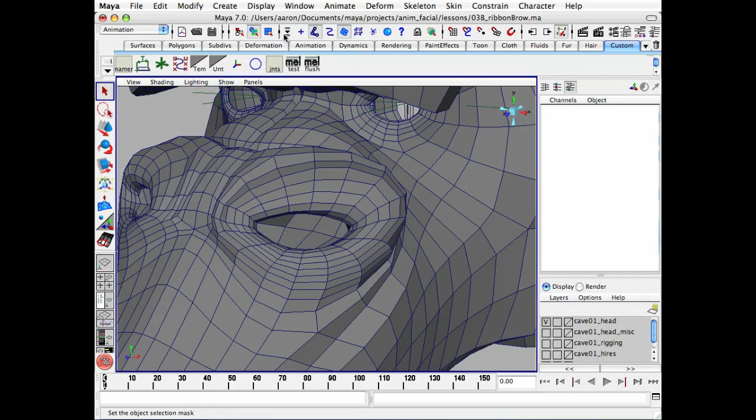We're going to start by building a visual guide, using a 1-degree spline going roughly from the inner corner to the outer corner of the nostril. I'll use point snap and select the create CV curve tool in the option box. Let me reset this, making sure the curve degree is set to linear. Close that, and once again with point snap on, I'm going to click.

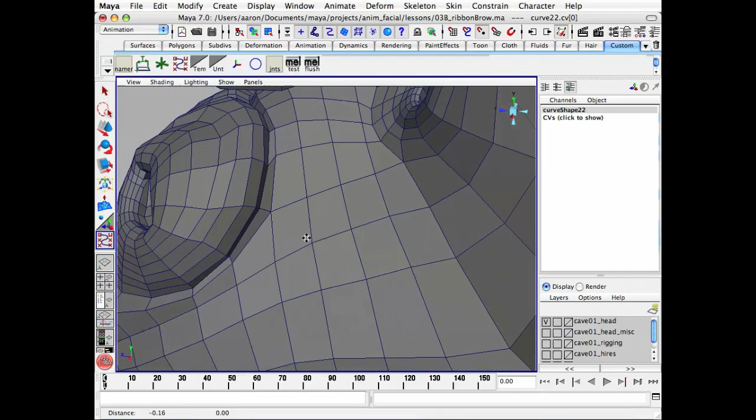Let's say right here on the inner nostril, and there for the outer.

Let me hide the polygons. Now I'm going to display the CVs on this curve: Display, NURBS component, CVs. You see we have one on each end. If I open the attribute editor, we can see that we have a 1-degree spline.

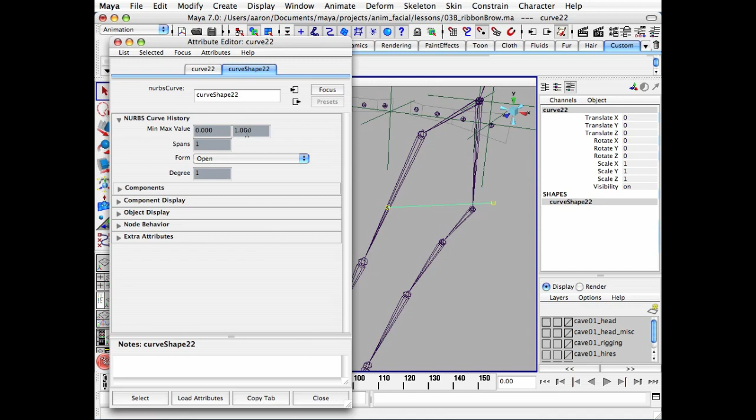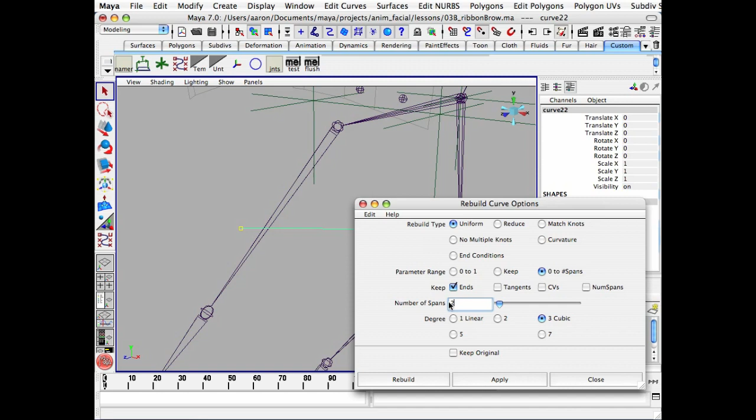With one span, I'm going to rebuild this so we have 2 spans, basically putting an extra CV in the center. With the spline still selected, switch to the modeling module and select Edit Curves, Rebuild Curve, option box. Let's reset this. I'll set the parameter range to 0 to number of spans, the number of spans to 2, and make sure the degree is linear.

If I hit rebuild, we can ignore the 2 CVs here. We're going to snap a joint on the first CV, the center, and the last.

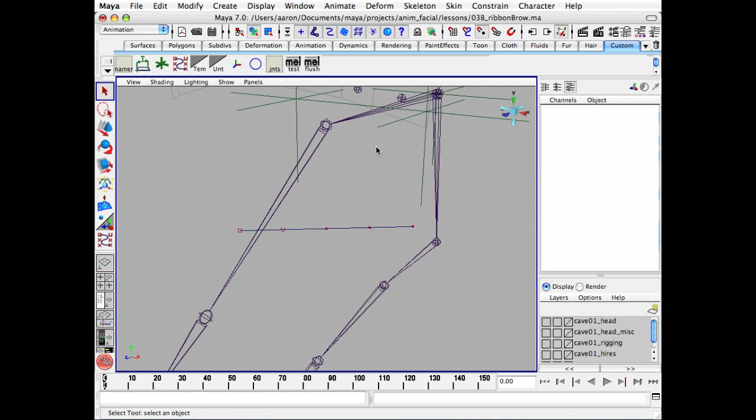I'm going to switch back to the animation module. We're ready to draw our first joint. Skeleton joint tool. Once again with point snap still selected, I'm going to click on the first, the center, and the last CVs.

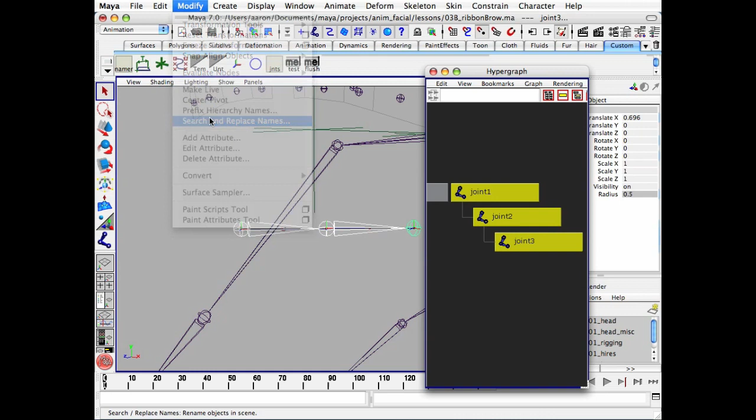I'm going to quickly rename these, because we're going to mirror them later on. I'll search for every instance of 'joint' and change it to cave01_l_nostril. I'm going to add an underscore JNT on the end here, since we're going to add these into the skin cluster.

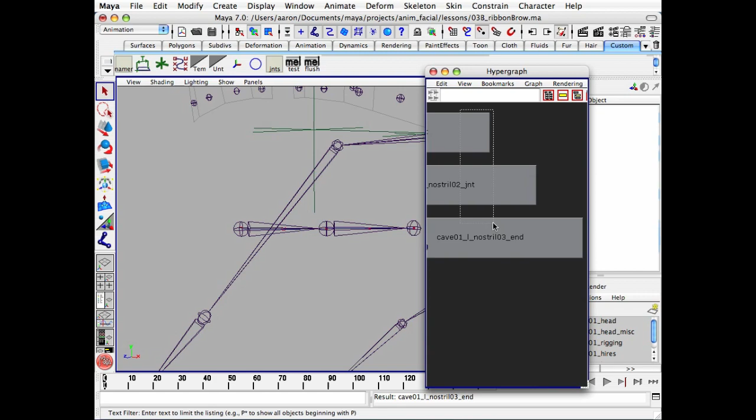This last one we're going to call 'end'. I'm going to display their local rotation axis: select all the joints and then select Display, Component Display, Local Rotation Axes.

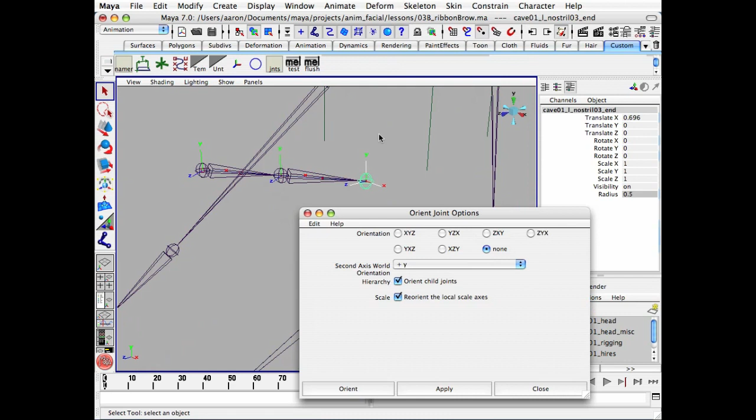First, let's orient the end joint. Skeleton, Orient Joint. Make sure our orientation is set to none, which means relative to its parent, there is no orientation change.

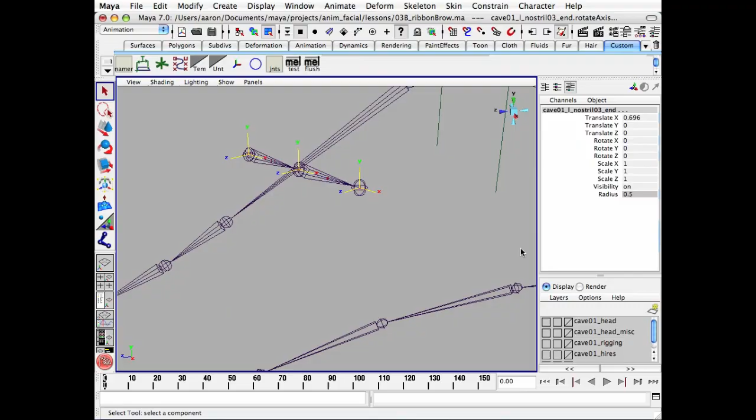I'm going to switch to component mode and toggle on the question mark icon, which selects the local rotation axis. I'll select all 3, display the geometry here, and just eyeball it. I'll rotate this so it's roughly matching the plane of the nostril. So here we can see the line is going through the plane of the nostril.

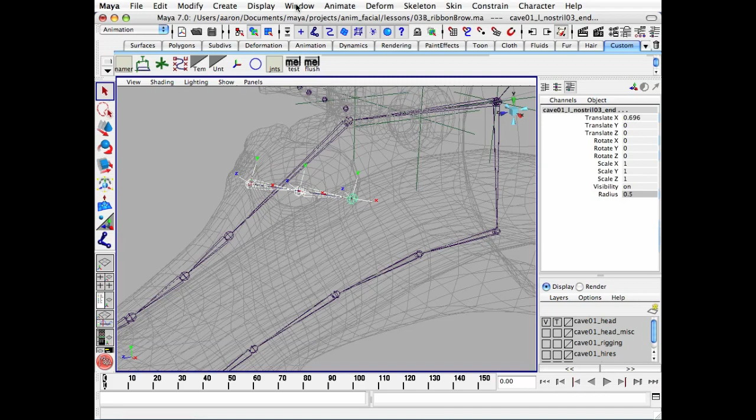Okay, switch back to object mode and hide these local rotation axes.

Now I'm going to create a 1-degree curve going from the center up to the outer edge and then from the center down.

Hide the joints for a moment. Reactivate our CV curve tool, once again with point snap selected. I'm going to click on the center CV here. Okay, so there's that. I'm going to show the CVs on that, and then create another curve going in the opposite direction.

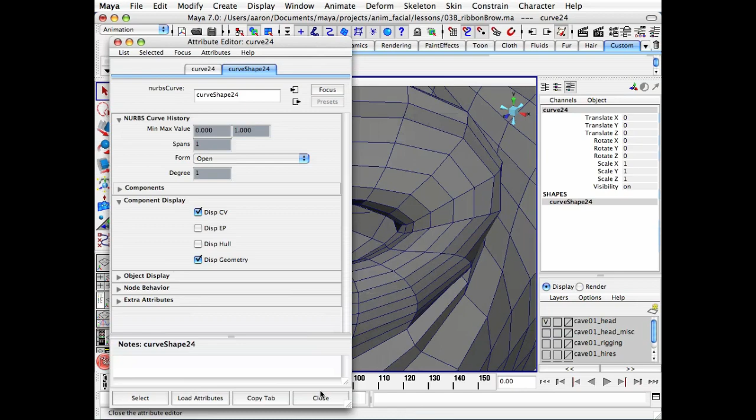Here I've activated curve snap, so I can snap to an edge, which Maya sees as a curve in this sense. Okay, so with that done.

Let's go in and create another series of joints. Let's show our joints once again, leaving our point snap turned on. Skeleton joint tool — create that joint, okay, and then create this. So we have one joint pointing up and the other pointing down on the nostril.

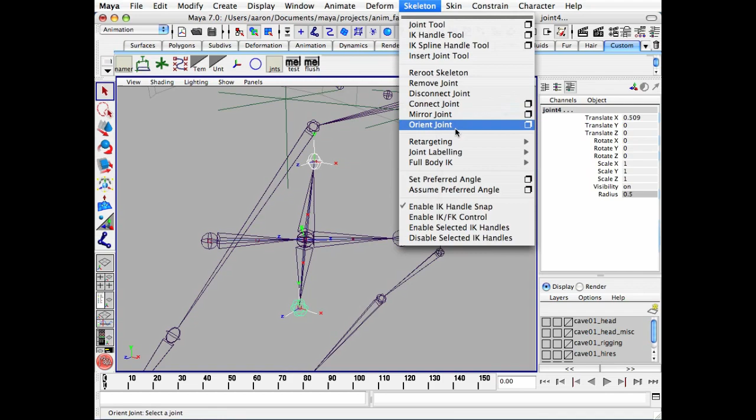I'm going to display their local rotation axes. I'm going to orient these end joints so that they match their parents: Skeleton, Orient Joint tool, and it's still set to none.

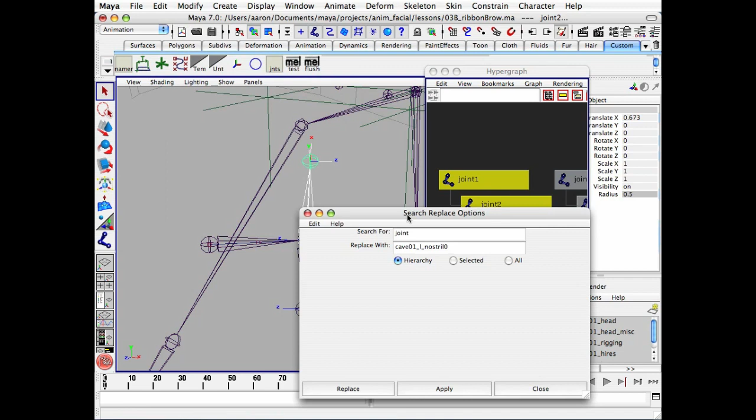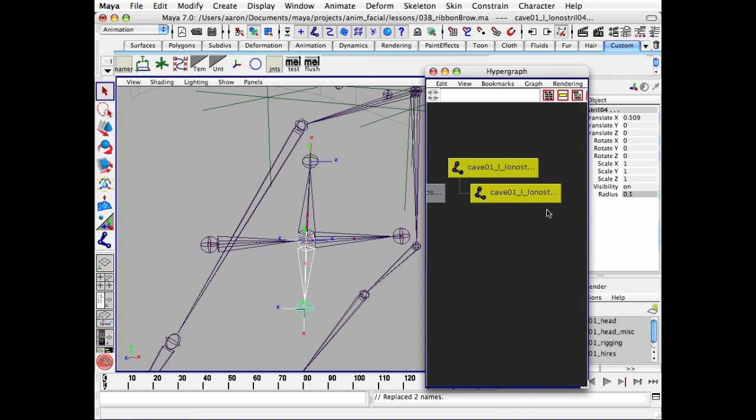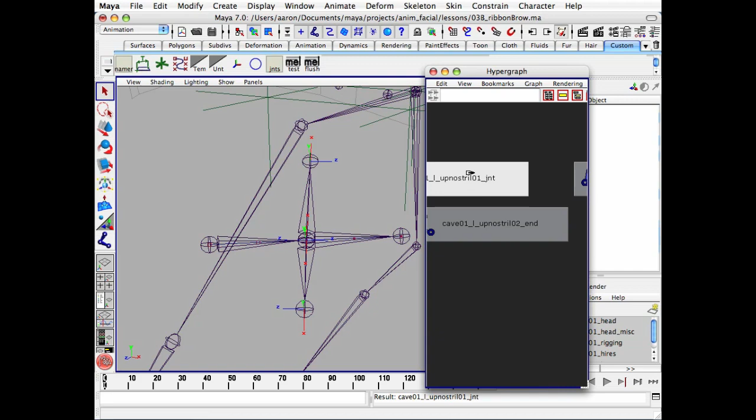Now let's name these. I'm naming these joints because we're going to need to mirror them later on. Once again, using the Modify, Search and Replace Names tool, I'm going to rename these to L up nostril. These will be low nostril. Change the numbering, change this to 01, JNT, and 02, end. And similarly rename this to end. And a JNT. So you can hide these local rotation axes.

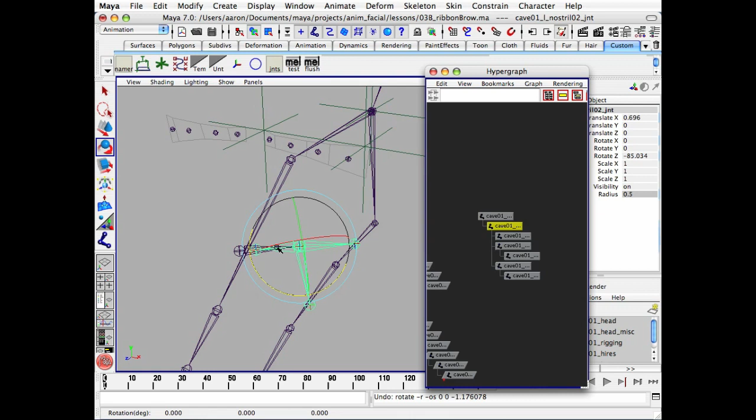So next what I'm going to do is, rather than simply parenting them, and I'll parent them to illustrate. If I were to parent them and then start rotating them, with approximately the 90-degree rotation, this lo nostril joint folds back on itself so that it points right back toward the first nostril joint. So rather than directly parenting them, we're going to create what I like to call an averaging joint.

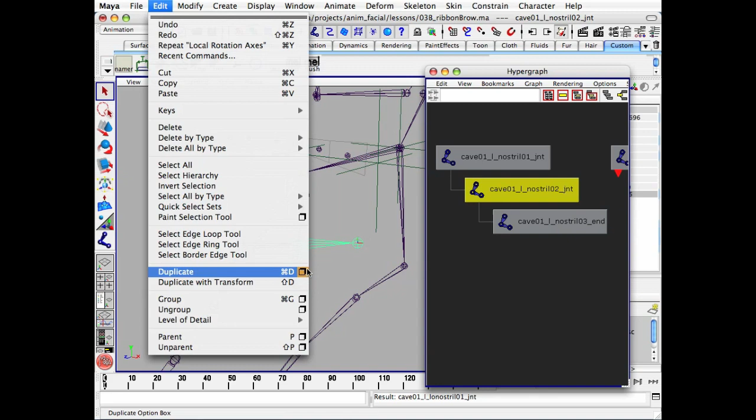What I'm going to do is I'm going to duplicate the second nostril joint. I can delete the duplicate end joint. I'm going to rename this from JNT to AVG. I'm going to parent this up and lo nostril joint to the new average joint.

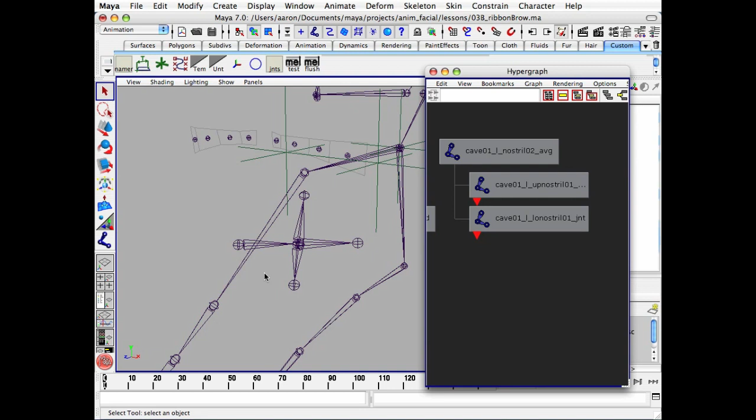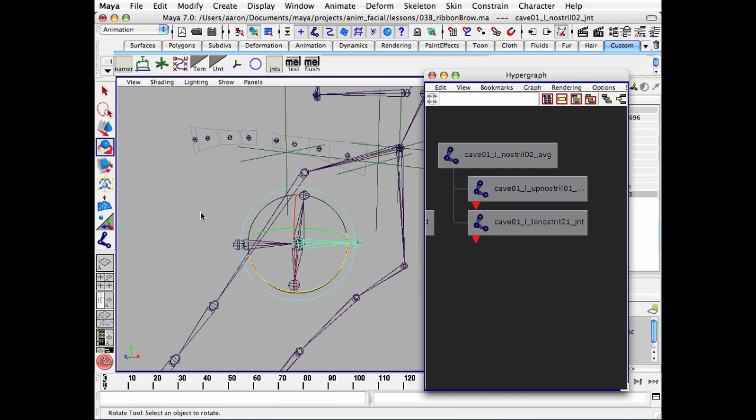So I'm going to use a multiply divide node so that this nostril average joint will average the rotations that it's getting from its parent, and it will do so by negating half the rotation. So for instance, if this were rotated 90 degrees in Z, let's say if it's negative 90, I'll multiply it by negative 0.5, negating 45 degrees of the rotation. Once we set up these node connections, it'll be fairly apparent what the end result is going to be.

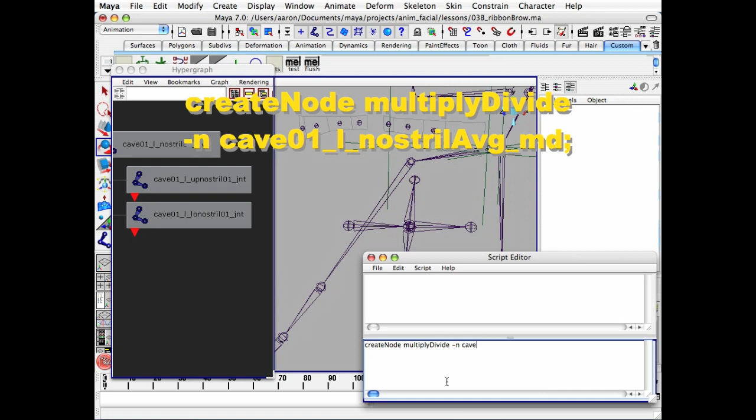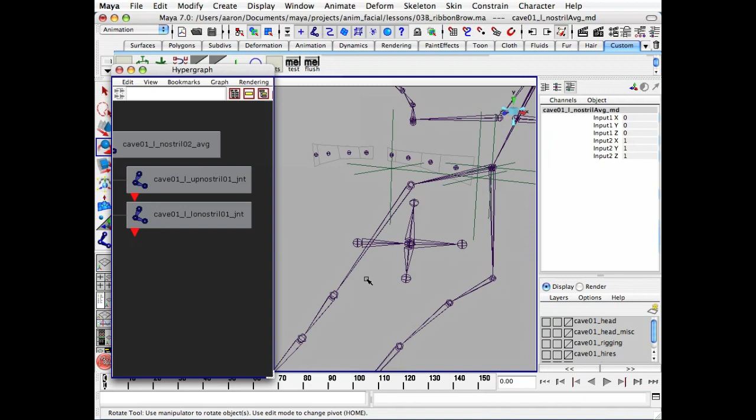Let's open up our script editor. Let's clear this out. I'm going to start by creating a multiply divide node. Create node, multiply divide. Let's give it a name. Okay. Now that this multiply divide node is created, I'm going to open the attribute editor and make sure it's set to multiply, which is the default. Then immediately open up the connection editor. Window, General Editors, Connection Editor.

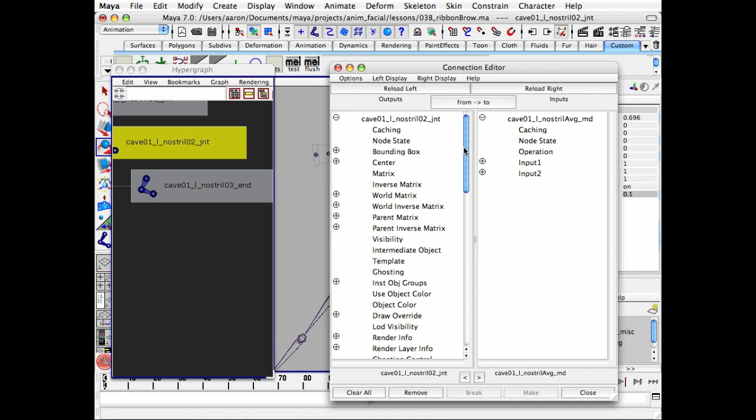So first I'm going to connect the rotation of the second nostril joint into the multiply divide node. So I'm going to load the multiply divide node into the inputs. Select the second nostril joint and load that into the outputs of the connection editor. Scroll down until I find rotate and connect that into input 1 of the multiply divide node.

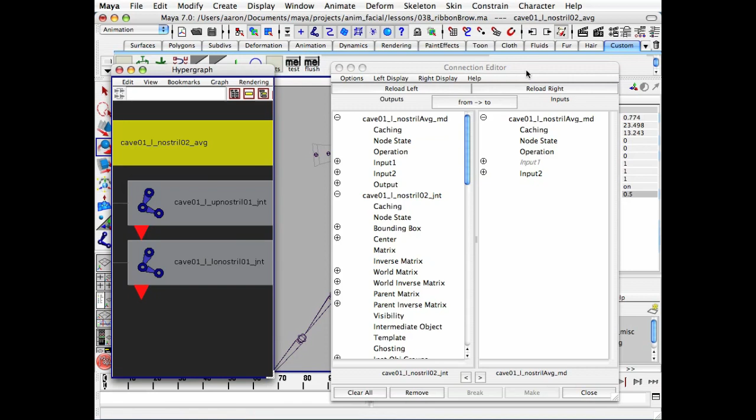Now in the channel box, I'm going to click on the multiply divide node so that that's selected. Load that into the outputs of the connection editor and scroll up until I find the outputs. Then select the nostril 02 average joint, load that into the inputs, and connect the output of the multiply divide node into the rotation of the average joint.

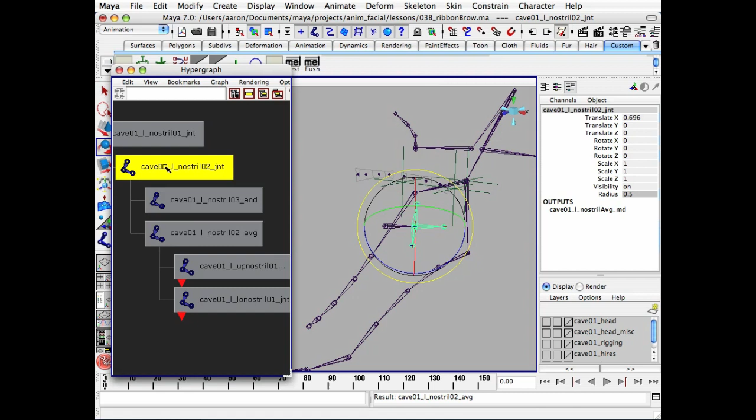So right now, even without parenting, it behaves as if it is parenting. So I have a negative 45-degree rotation on the second nostril joint. If we look at our average joint, we have a negative 45-degree rotation in Z as well. That's because there's a direct connection. What I'm going to do is I'm going to parent the nostril average joint to the nostril 2 joint. So now when we rotate this, we're going to get double the rotation because we'll get the rotations from the parent-child relationship as well as from the node connection. You see there we're getting double the rotations.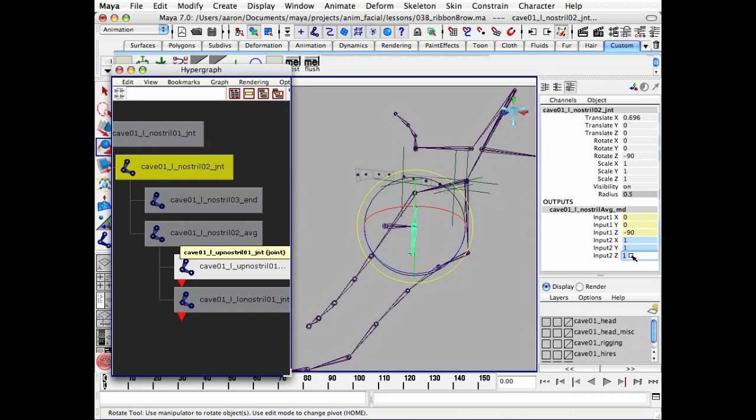Let's set this to minus 90. What we need to do is we need to set all of the input 2 channels of the multiply divide node to 0.5. What that effectively does is it negates the rotations by half, which in essence averages those rotations. If we rotate to a negative 90, rather than folding back on itself, it dampens or averages those rotations. So that way we'll be able to maintain a lot more volume in the nostrils here.

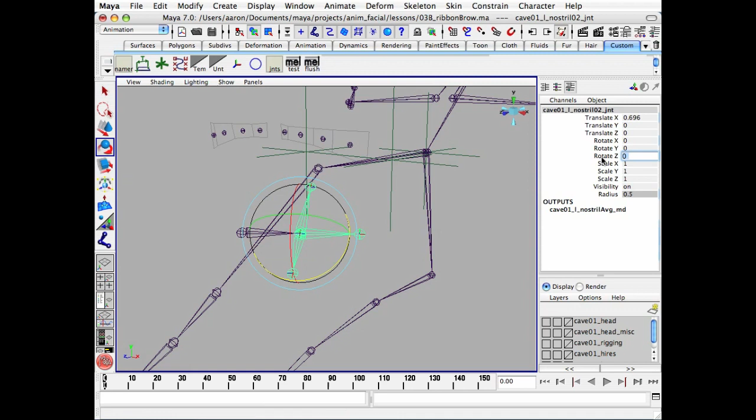Okay. So I'm going to clean off these joints. I'll just leave them as is for now, and then do that at a later time. Okay, so here we have our full left nostril.

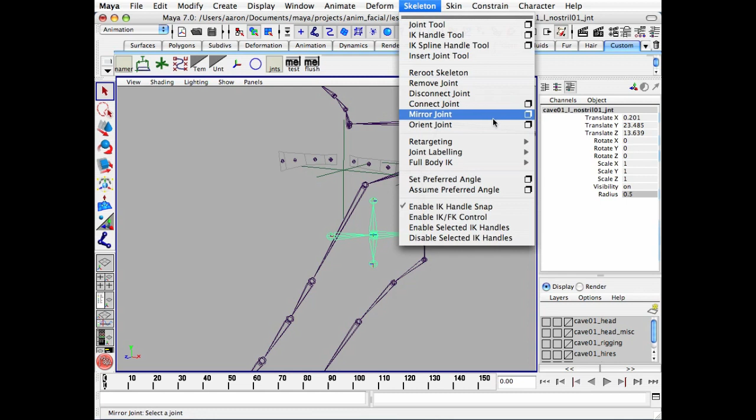Let's mirror that over to the right side. We're going to lose our multiply divide nodes, but we can recreate that later. So with the first nostril joint selected, I'm going to select Skeleton, Mirror Joint Tool. Make sure that Behavior is selected.

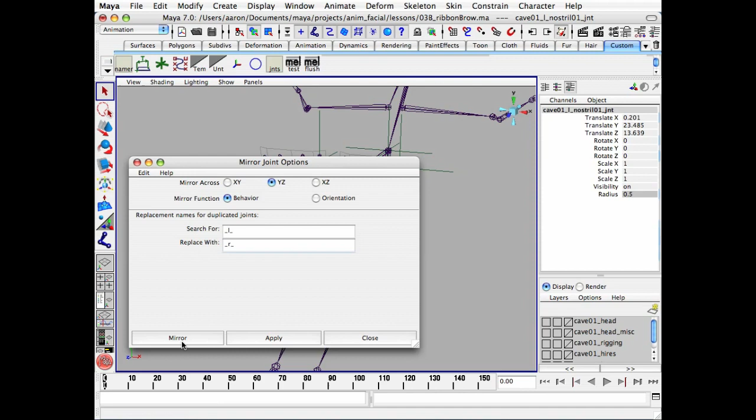I'm going to mirror and search for everything that has _L_, which is my left side token, and change that to right. And I'm going to mirror across the YZ axis, which once again cuts down the center line of the character. Okay, so there we have our right side joints. And their behaviors are mirrored.

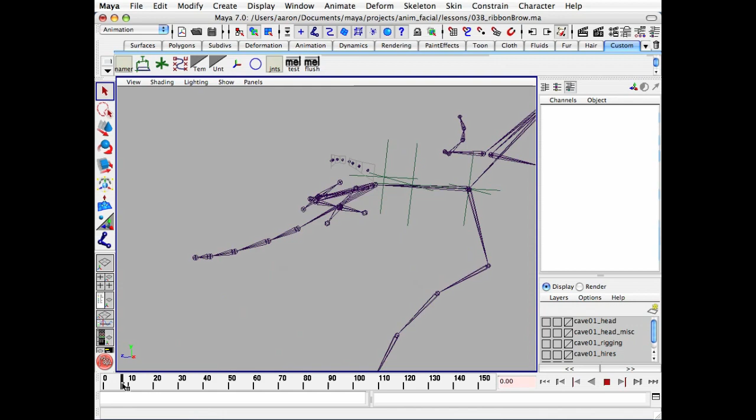I'm going to parent these to the up jaw joint. Since this joint controls all of the nostril area, this will be the parent for these two nostril joints. So I'm going to select them, two nostril joints, shift select the up jaw joint, and simply hit P. So now when we look at our range of motion, our nostrils are behaving as we would expect.

So at this point, I'm going to go in, once they're mirrored, and remove some of these channels, like the visibility and radius. I'm going to hide those. I'm going to lock and hide all of the translation channels. And let's leave the scales open.

Select all the end joints. Once again, hide their visibility and radius, and then lock and hide all of the channels since there won't be any animation on these end joints. I'm going to select the up and down nostril joints. And lock and hide the translate channels.

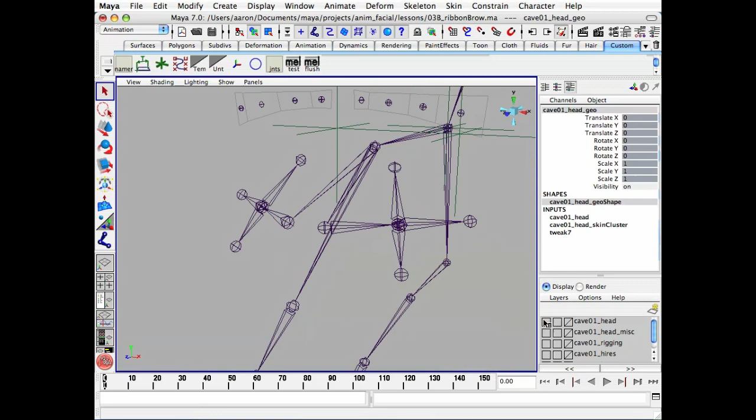So I'm going to add these joints as influences to this mesh. So I've selected the mesh. I'll shift select the joints of the nostril. Then select Skin, Edit Smooth Skin, Add Influence, option box.

We have our options from the last time we added joints as influences, meaning that use geometry is disabled and lock weights is turned on, since I want to have control over how these influences are added into the skin cluster. Then I'll click add. So now these joints have been added to the skin cluster, but if I rotate them, they have no effect because I've locked their influence. So now what I'm going to do is start painting the weights for these nostril joints.

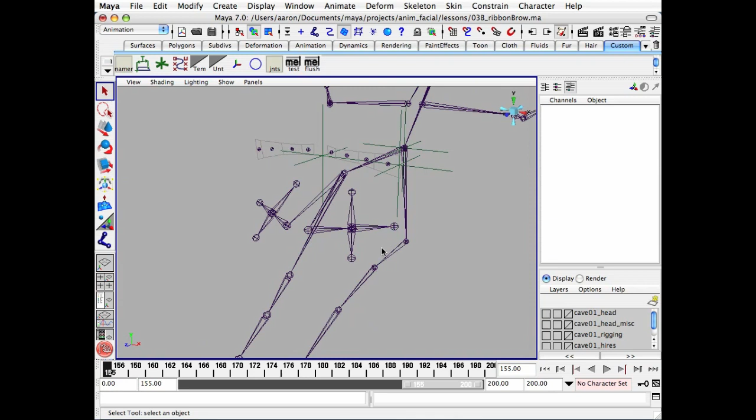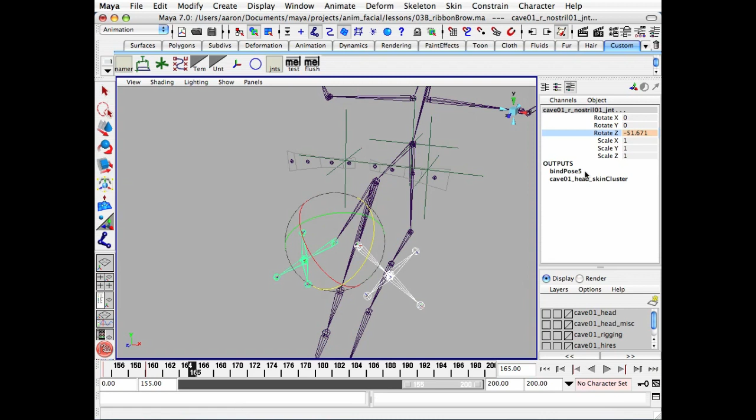I'm going to create a new set of frames for this timeline here. So I'm going to go from, let's take it all the way to 200. And 155 is the last frame. I'm going to use this to add animation onto the nostrils. So give it its own range of motion. Once again, I do this so that I can have this range of motion on the joints and just simply scroll through in the timeline and not have to constantly zero out my controls.

Let's go in extreme 45 and then negative 45. Here we're going to do a little scale X. Scale them to 1.5 times their normal length. Take them back to 1. Then do the same with the lower nostril joints.

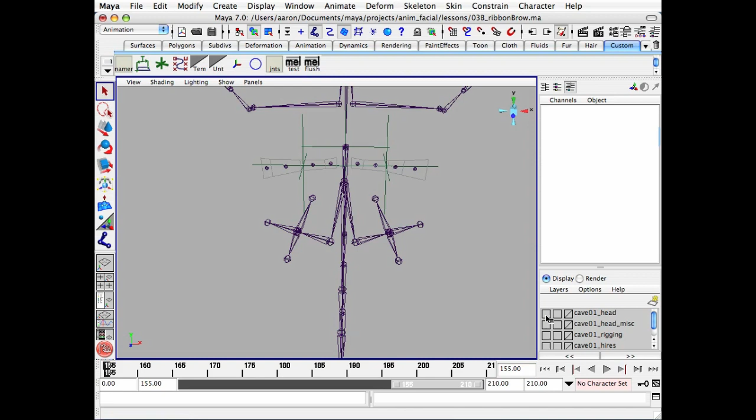Okay, so here's the range of motion we have for the nostrils. Okay, set these back to 1 on this last frame here. Okay, so here's our nostril range of motion. So once again, just touching all the joints. Okay, so now we can go in and start adding the weight influence.

With the mesh selected, I can either select Skin, Edit Smooth Skin, Paint Skin Weights tool option box, or I can right mouse click on the mesh, select Paint, Skin Cluster, and then select the head skin cluster, which is the only skin cluster on this object, and puts us in paint mode.

Okay, so I have a solid brush at a weight of 1. Here are my right nostril joints. I'll unhold those since they were added with hold enabled, so locking their weights. And now I'm unlocking the left nostril joints. I'm going to go in and just start adding in these weights. Once again, working in a very rough manner, just getting the volumes moving. Then we'll go in later and refine this.

Right now I'm working with the end joint, so the second nostril joint. Okay, now the first nostril joint.

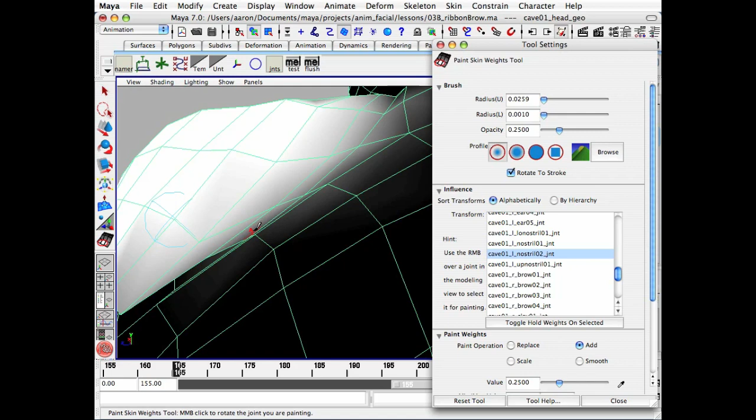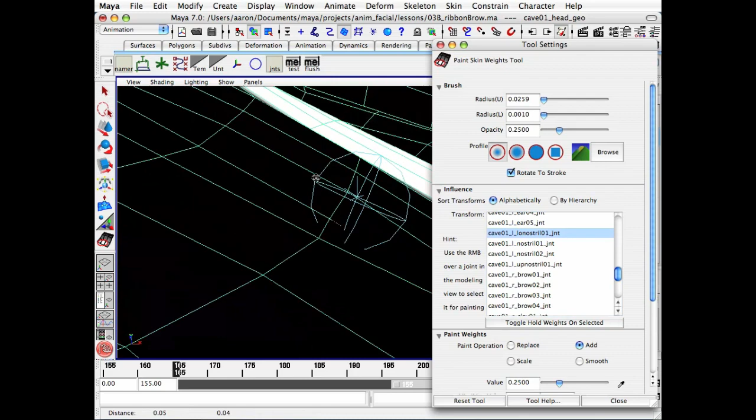Just trying to work very fast, knowing that I can go in at any time later and add refinement to these weights. But I want to first of all test to see if the ideas will work. And then once I have that solution roughly blocked in, then I'll go in and refine it later on. But the first thing is just to get it working in a minimal sense. Because often I'll find myself needing to kick out a rig for early animation testing.

Often I'll do a first pass of joint placement, do this first pass rough weighting without much refinement, and then kick it out to an animator for feedback. And then I don't want to go too far with the refinement because chances are there will be changes. They'll use controls in ways that I will not have anticipated, or want to add or reposition or change controls. So I don't want to invest too much time. I do want to get it basically working. That's what I'm doing here.

Mainly not to torture you with the prospect of watching me weight this character in its entirety, but rather to show the techniques and to weight them well enough so that you can see clearly what the effect is that I'm going for with some of these rigging structures that I'm building here.